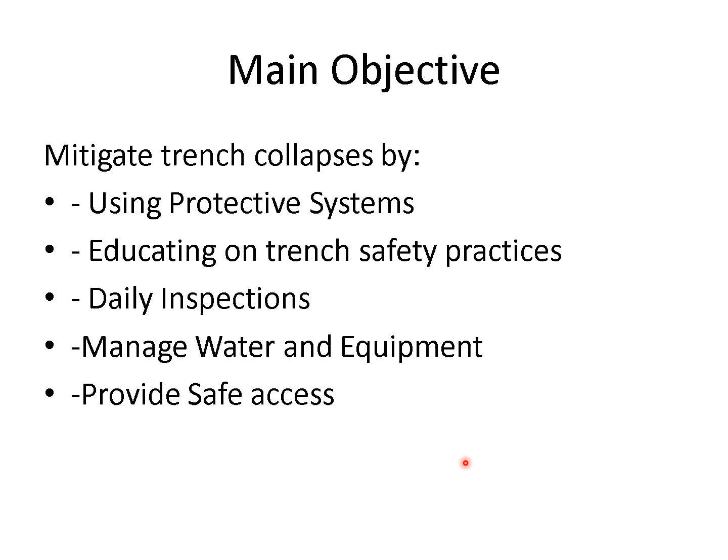So, picture this. An employee is laying utility pipes in a trench without any protective devices. The trench collapses, and within seconds, they're buried up to their chest, or even worse than that. Why did this happen? Well, first, there are probably no trench shields. Pretty first and foremost. Second, the soil probably wasn't inspected. There are different types of soil, and some are a lot more dangerous than the others.

And lastly, and honestly most importantly, the crew assumed that it won't happen to us. It happens to other people, but it won't happen to me. Invulnerability will get you killed. Here's the reality. Honestly, it can happen to anyone, anywhere, and it happens all the time. This incident shows us why protective systems are non-negotiable. The cost of skipping safety is just too high.

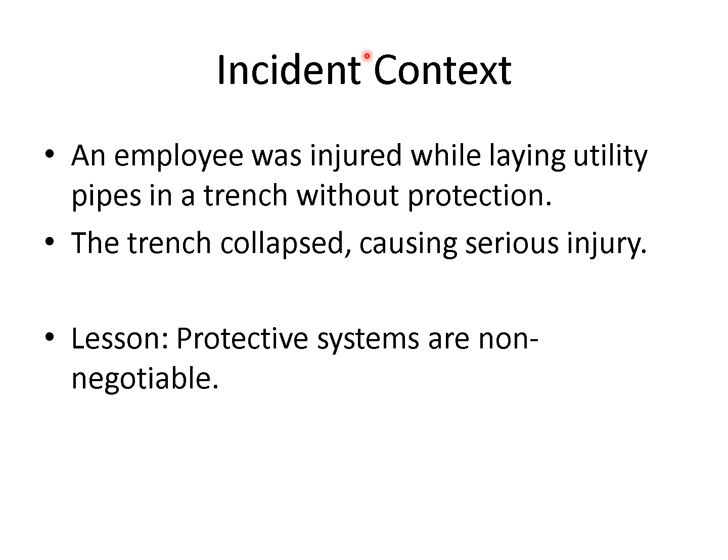Well, I'm sure you guys know by now that we work in a fairly dangerous field, and at this point in the game, we have to accept the harsh reality about trenches. Trench collapses are almost always fatal. Soil is incredibly heavy if you haven't figured that out yet. 1 cubic yard of soil can weigh up to 3,000 pounds. That's the equivalent of a compact car falling right on top of you. So imagine a trench collapses and a bunch of Priuses fall on you.

Not good. Next is unstable soil, specifically type C. It's the least stable and crumbles under pressure. Without reinforcement, you're at constant risk of collapse. Not good. Heavy equipment near trench edges, the vibrations from those big diesel engines running, and honestly the weight of the machines works to destabilize the walls. Imagine trying to balance a stack of blocks while someone shakes the table. Probably not a good result.

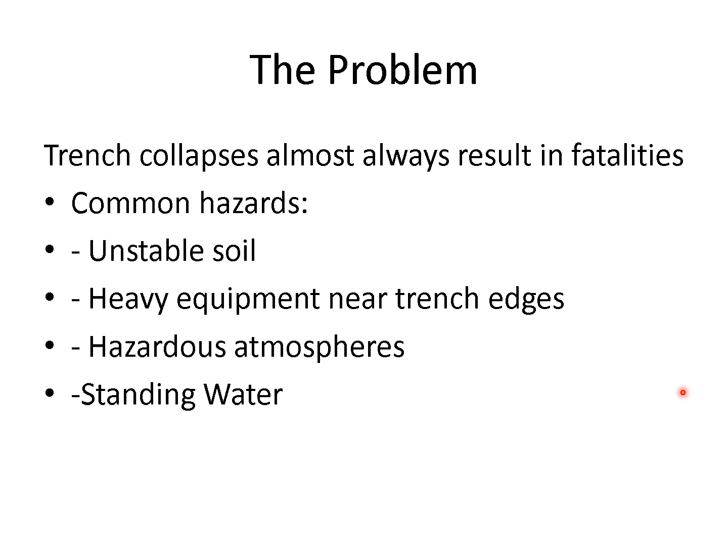Hazardous atmospheres are also a huge issue. Trenches accumulate toxic gases, and they also deplete oxygen. So at the bottom, it may just be full of carbon dioxide. This is why atmospheric testing is critical. Standing water also weakens the soil integrity and turns everything into a trap. The trenches are a very, very bad place to be in if everything is not up to snuff. Ignoring any of these issues is a recipe for guaranteed disaster.

OSHA, OSHA, OSHA. You love them or you hate them, but you have to respect what they're trying to do. The OSHA standards help us mitigate risk. First, shoring, shielding, and sloping. These systems stabilize trench walls and protect workers. Without them, you're at the mercy of gravity. Gravity doesn't care if you have kids at home. Safe access for trenches over 4 feet deep. Ladders and ramps ensure workers can quickly escape in case of an emergency.

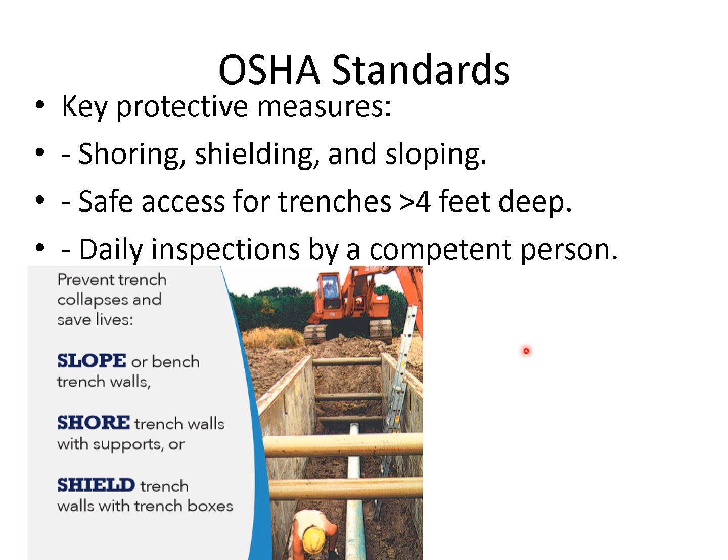Daily inspections, very, very important. They have to be performed by a competent person who must check the trench for cracks, water seepage, and other hazards. This step is crucial because conditions change rapidly, especially after rain or equipment use. OSHA standards are there for a reason. They're the difference between a safe site and a tragic one.

Caught in between hazards. Caught in between hazards occur when a worker is crushed or trapped between objects. In trenching, this often happens when the walls collapse, which buries workers, or heavy equipment pins workers against the walls, or maybe even against other machinery. Caught in between is also part of OSHA's Focus 4, so it's one of the 4 most dangerous things that we experience in our industry.

To prevent this, we're going to use trench boxes, right? These are used to keep the walls stable, stop everything from collapsing in. We're going to keep heavy equipment away from the trench edges, 2 feet or more, as you can see here. And then we're also going to conduct regular inspections. We're doing this to catch hazards before they escalate.

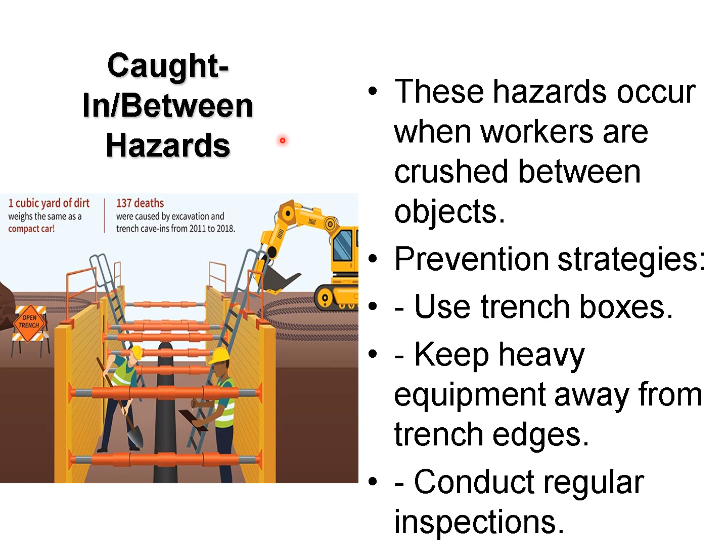Caught in between incidents are fast and unforgiving. Prevention is our only defense. Now, why do trenches collapse? Let's take a look at this real-life example and identify some of the issues here.

First, unstable soil. This one doesn't look terrible, but it's no concrete or no nothing, right? So if the soil isn't properly classified and reinforced, it's definitely a disaster waiting to happen. Next, no protective systems. Skipping trench shields and shoring is like driving without a seatbelt. You might get lucky, but it only takes once. The risk isn't worth it.

Water accumulation. So water compromises the integrity of even the strongest soil. Pumps or proper drainage can save lives. If you look here, the worker in an unprotected vertical wall trench is exposed to being completely engulfed. So if he's down there and something falls, the rest of it's going to fall and he just gets turned into a mummy. Not good.

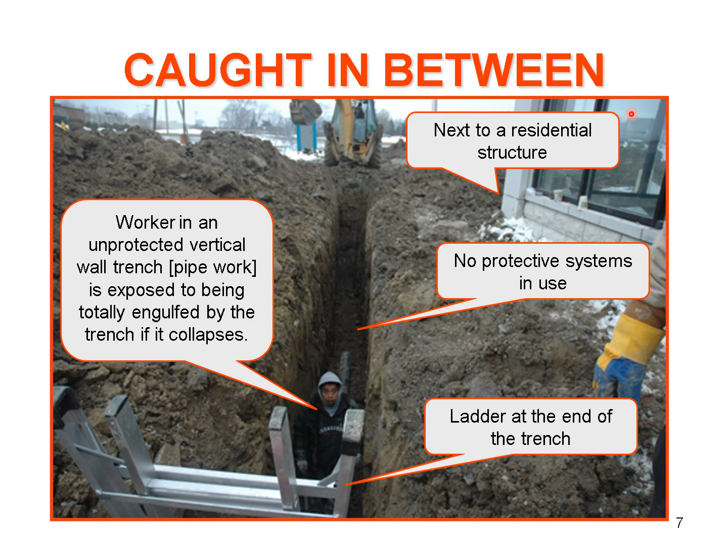See the ladder at the end of the trench. The ladder can slip, he can fall off, not good. Here again you see no protective systems, and also it's next to a residential structure. So just all around there's a lot of risk in this site.

So we have the causes of trench collapse. Here's some of the ones that we just talked about in the previous slide, but we really want to focus in on the types of soil. So type A is going to be your most stable soil. Think clay, silty clay, sandy clay, all your cohesives, right? Type B is going to have your silty loam, sandy loam, and you start introducing things like gravel and angular gravel. So less stable than type A.

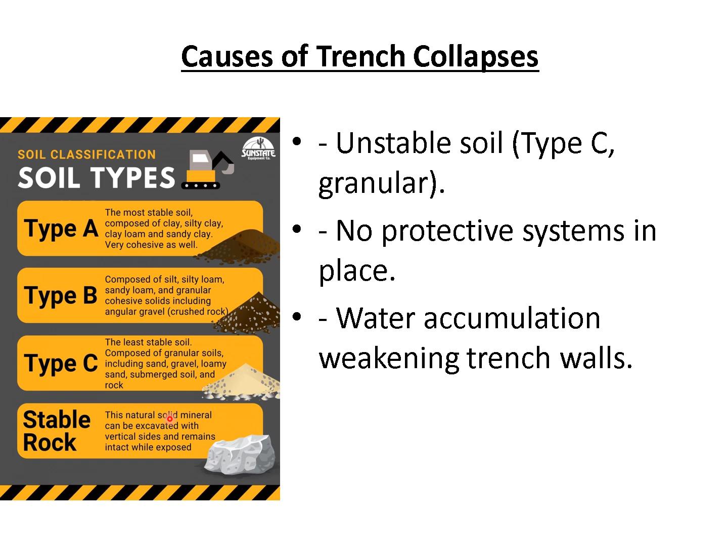Type C is going to be the least stable of them all. Think sand, loamy sand, submerged soil, gravel, granular soil, right? So these are the things that you can step in and it'll displace, and it can just honestly, again, be a disaster waiting to happen if you have not accounted for this. So you need to know your type of soil.

So we've identified all of the dangers that make a trench dangerous, right? But now we need to know how to stay safe. It begins with a pre-dig inspection, a thorough one at that. We're going to start off with identifying our soil type. We're going to make sure if we're working with A, B, C soil, maybe even solid rock, and then we're going to plan accordingly. Then we're going to identify underground utilities. We're looking for gas lines, power lines, water mains, etc. Hitting one of those could make a bad day worse.

We're going to plan protective systems. Every trench requires a specific protective system, tailored to its depth, soil type, and surrounding environment. So that's where we're going to decide on the different shoring, shielding, or sloping that we may need. It can change based on soil classification, trench depth, etc.

After that, we're going to assess the environment. We're going to check external factors like nearby heavy equipment, weather, and vibrations. All these can work together to compromise trench stability. More kind of on the weather: if it's going to pour down raining tomorrow, it's probably not a good idea to dig the trench today.

After that, we're going to put together a rescue plan. So first, we're going to identify exit points and position ladders or ramps every 25 feet if your trench is over 4 feet deep. We're also going to train workers on how to react during an emergency. These are things like calling for help, providing first aid, etc. Having a plan already can ensure a swift response in the event of an emergency. That way we can save lives.

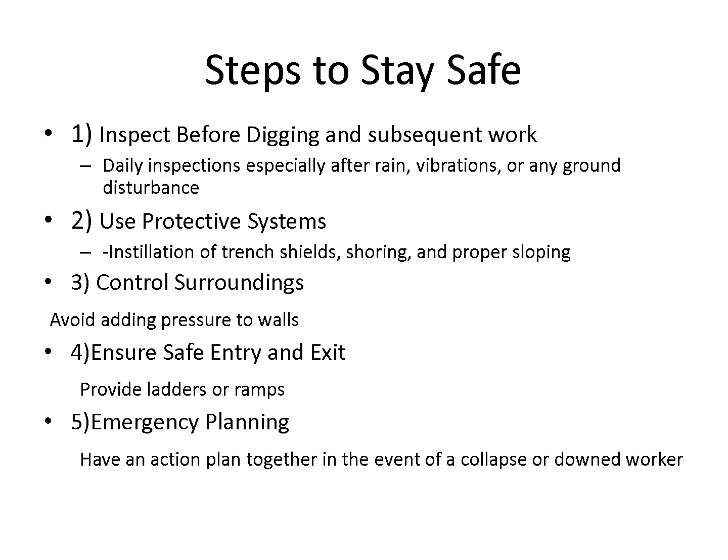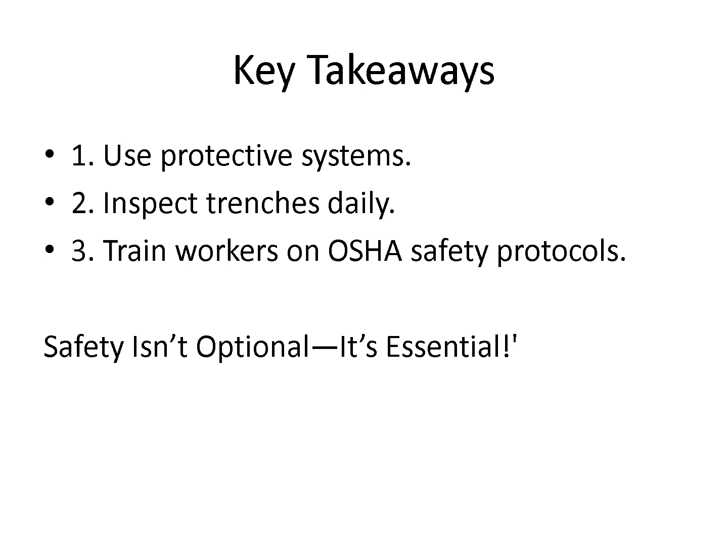So, you got an earful. Let's wrap it up. First, we're going to use protective systems to stabilize trenches. We're going to inspect these trenches daily. Conditions can change in an instant. Then we're going to train every worker on OSHA safety protocols because knowledge saves lives. Safety isn't just a box to check, it's a commitment. Safety isn't optional, it's essential. If you value your life, you should value safety as well.

Now, it's time to act. Together we can prevent trench collapses and save lives. If you see something unsafe, say something. Report it. Participate in training sessions. Let's build a culture where safety comes first. Thank you for your attention, and let's dig smart and stay safe.